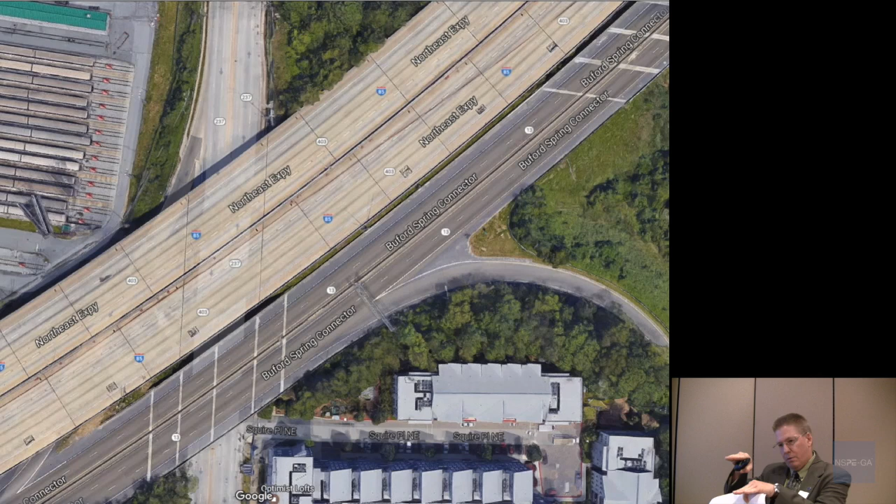One thing that's kind of interesting: 85 kind of sits up at this elevation. Buford Spring Connector sits down a little bit lower, but it's still not all the way down. So to me, it looked like there's kind of a high bank along Buford Spring Connector where it dips down. There we go, back. Where it dips down under the bridge a little bit.

So just from what I saw at the fire, it looked to me like as this fire was going, the fire kind of migrated this direction. And that's what we ended up seeing. We had damage. Obviously, this span was down. We ended up having to replace this span, and then all these three spans as well. But it looked like the fire headed this direction where it was open out in this area.

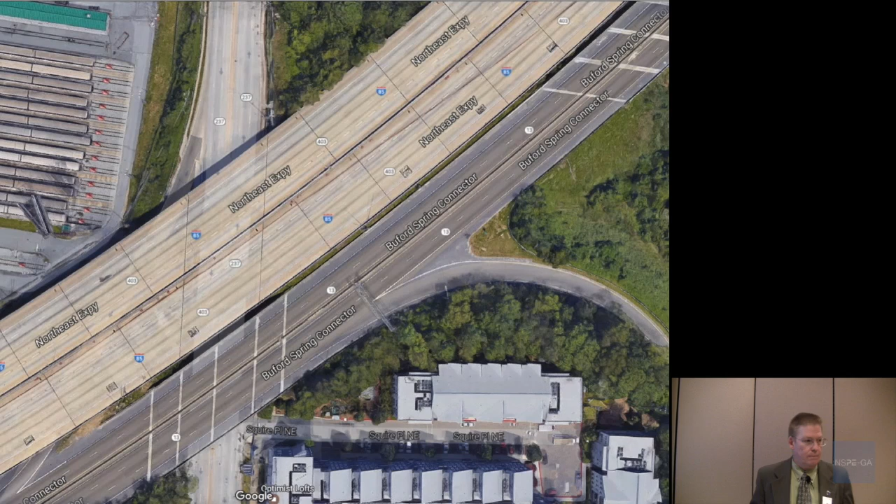Certainly not the first night. First night you couldn't get down there. This is probably demolition starting on the 31st. The event happened the night of March 30th. So this is either early in the morning or later that evening. I don't know which one.

It was probably early in the morning, but I know at some point during the night, because of the materials that were down, they were still burning. The contractor had to come in there and open it up and vent it so that the firemen could put the fire out. So when did you let your first contract? So, good question.

I went straight to the office when I got out to the site at probably 1 a.m. in the morning. C.W. Matthews had already moved on, and they were setting up. They were setting out traffic control. They were setting out what we call light plants to light up the site. And then they had a sub come in. This is D.H. Griffin, you can see here. They had a sub come in to primarily work on their demolition.

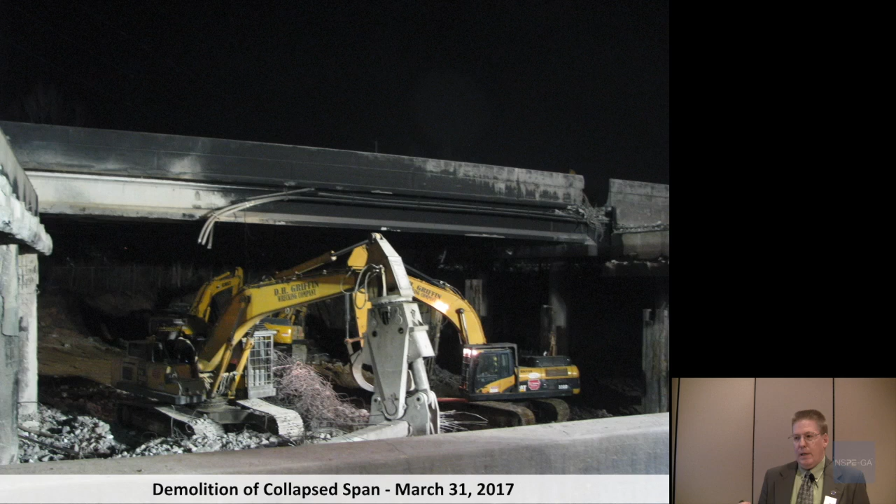Now, in these emergency type contracts, it's two phases. One of it is the demolition. The other phase is the reconstruction. We can handle it both ways, but in this case, we needed to handle it in two phases. With the demolition, we can handle it by what's called a force account. That way, they start bringing in everything, and we're monitoring what they're bringing in to work.

And what we have is these guys. So this is a DOT inspector. This is actually a Moreland Altobelli inspector. They're out there monitoring what equipment's out there, what labor force, and what time they're putting in. And that way once we agree on a price, all we have to do is work on that total amount, the time that was there. We just pay them for the amount.

So this contract was written before this thing happened? Not for the force account, no. And I'm not sure exactly at what point the force account was executed. What we have to know is what are the common rates for that type of work. And then all we have to do is maintain a record of what's out there, and then we just back figure. So it's an on-call contract? I don't think it's an on-call contract. It's just set up. So something like this happened, and then Russell or somebody called up C.W. Matthews and said, "You guys need to be here."

Most likely, yes. Yes, okay. Yeah, and it's not something new. I mean, we've done this a number of times. I was telling, I think, Phil or Steve earlier that we had the fire up on 285 around the perimeter years ago. We had a couple of contractors show up there, and we have a number of things that happen

throughout. We'll have bridges that are impacted, and I had one a year and a half ago out on Memorial Drive where we had a retaining wall fail, and we get the contractor out there, get them in a force account, calculate all the materials we need, and we just pay them back. That's real handy in this type of application.

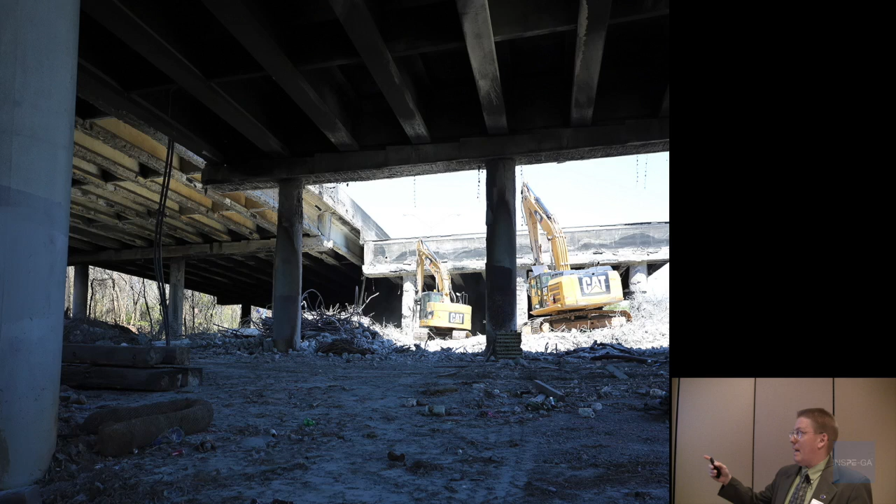DH Griffin, this is probably the first light, because you can see all the spans are up except for the one collapsed span. They were hard at it trying to demo the project. I really wanted to focus in on a couple of slides. It's kind of hard to see because most of the slides aren't very good, but you can start making out some of the concrete where the concrete spalled.

Well, I'll show you on this part. Now, this is interesting, and there's going to be a better photo when I get to some of the sheets that were prepared. This type of cap is what we call an inverted T. So it's a T shape. The beams sit down on the ledge, and the top of the deck comes in right at the top of the cap there; the deck goes right over top of that cap.

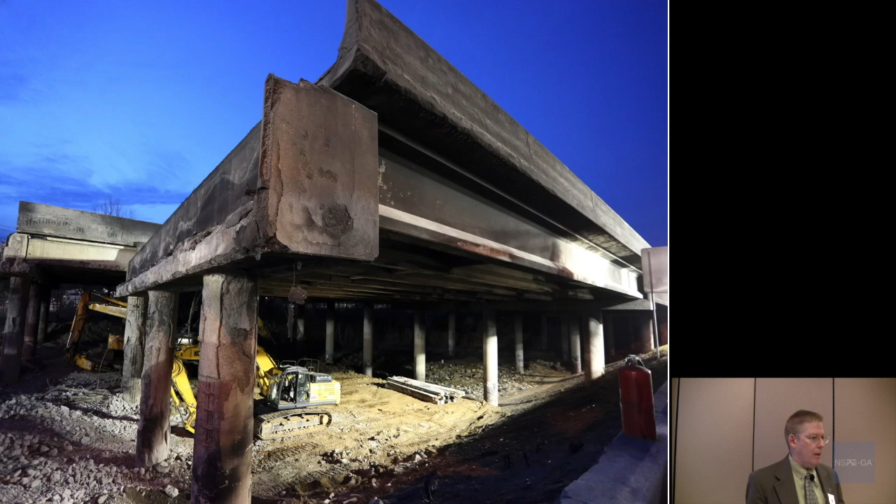It's a little bit different than what we normally do. It's typically used for low clearance situations where, if something's going to drive up under the bridge, you'll do this type of construction. Well, if you'll notice here, this is where the span collapsed, and that ledge is entirely in place. Which suggests that the span just overheated, the strands relaxed, and the span fell, but the substructure stayed intact.

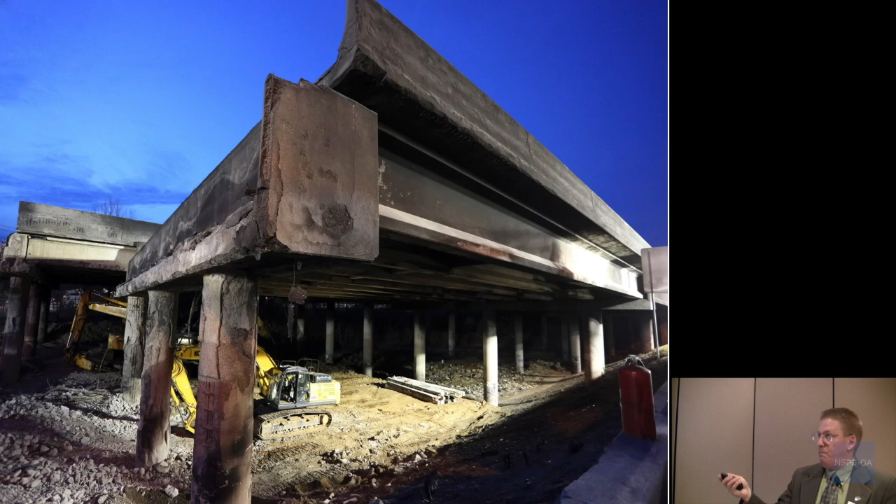Excuse me? It does. I'll show you bearings as we go on, and there's some dowels, and I'll show you a picture of what those look like eventually. But here you can see the reinforcement is exposed. This has not been hit by the demolition. This is purely fire.

Like I said, our inspectors were on board that night. First of all, you get there and assess the whole scene, but then you've got to wait for the fire to get out. It was smoky. Even when I was there at 1 o'clock, it was still way smoky. But you've got to assess it. You've got to be careful because you don't want to go under it not knowing if something else is going to come down.

So the inspectors, as they got in there, were noticing that some of the columns were showing signs of buckling. That's when you really get concerned, very nervous. So the span's down. We know 85 northbound was out of service. It's when we started seeing signs like this along Piedmont, and seeing that buckling shape, knowing we've got a real problem over Piedmont.

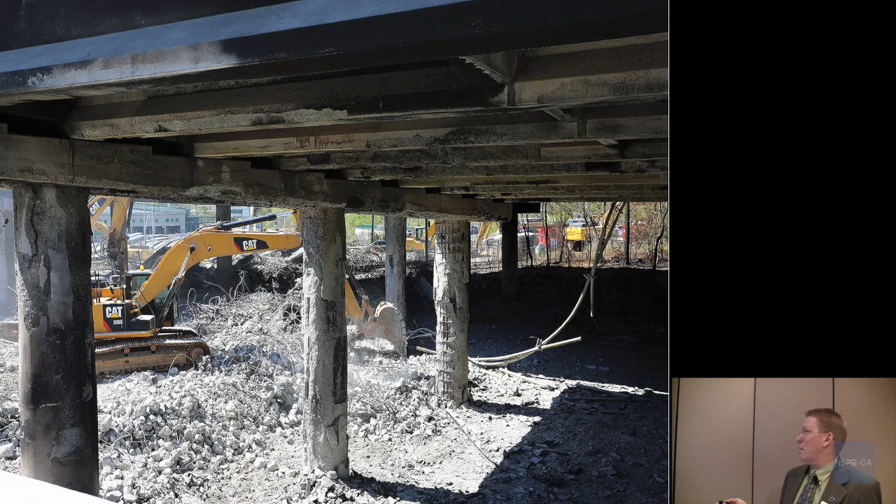Just one last final photo. There again, you can see the damage along the pre-stressed beams as well. All of that concrete starting to spall and burn up. The fire will do a job on concrete just as well as steel. So,

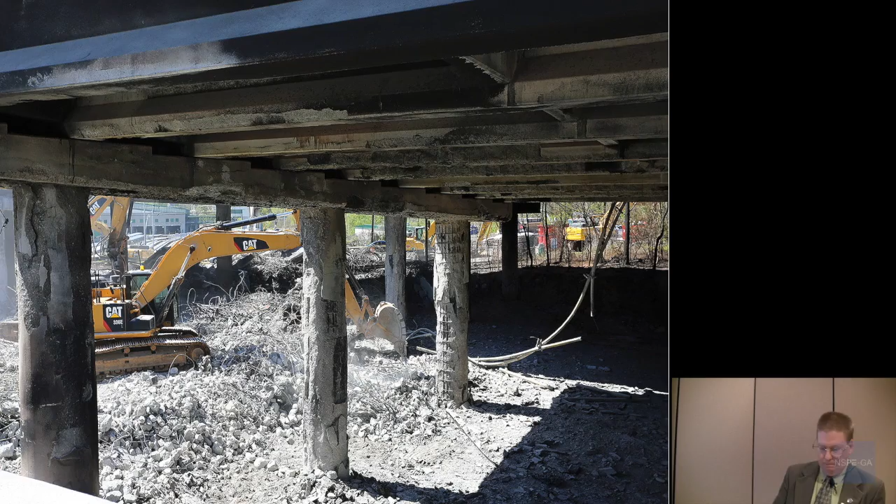So when I got to the office, had another engineer from my office come in, because there's not a lot to do as we're assessing things, other than basically pull together all the plans, talk to my people that are in the field, and start getting familiar with the plans.

And you'll see as we go through this kind of how, if this had been just a routine, if I go to bent 31, 32 this way, everything's nice and spans are all identical. You know, that would have been, I don't know, better. But in this case, everything's different, and you'll see that as we go. How many different families did you have? Six. Everyone is different. Yeah, I think these two are probably the only two that were the same.

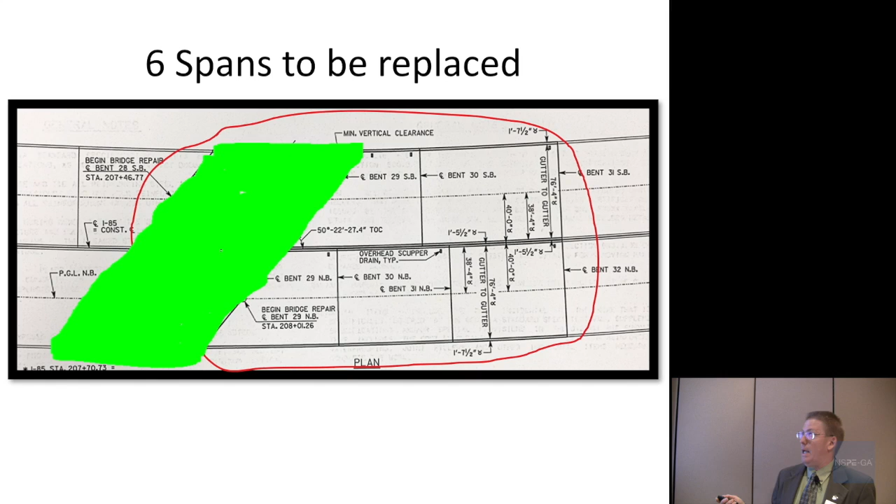You know, we have an opportunity now to just... this is what we're producing now. We're putting this in most of the bridges. The only difference is now I've got to redesign some beams, and back to where we were. That's with all these spans. It's a total of 61 beams, but I can't remember how many beam designs. Every one of these trapezoidal spans has numerous beams because they're all different lengths.

Now, not everybody's a civil in here, but you know what concrete is. Concrete's very strong in compression, but it's not strong in tension. So we counteract that. We put reinforcement in there. Well, with the pre-stressed beam, we put these strands in there. They're high tension cables. Instead of a grade 40 bar, grade 60 bar, they're 270 KSI.

So we stretch each one of those strands about 33,000 pounds. You put about 30 of them in there, that's about 900,000 pounds of force that we're putting back into those beams. And so that's what was happening with the existing beams: when that temperature hit those beams and they started unraveling the concrete, those strands started relaxing. And that's really not a good thing. Anyway, so this is the design that we had to work with.

You mentioned the dowel or the bearing. We'd have a dowel pin that goes right up in here inside the end of the beam, and that's what keeps the beam in place. And they were there in the old bridge as well. When was this bridge built? What year? It was built '83, '84, around there. Okay. Yeah, it's not that old. No.

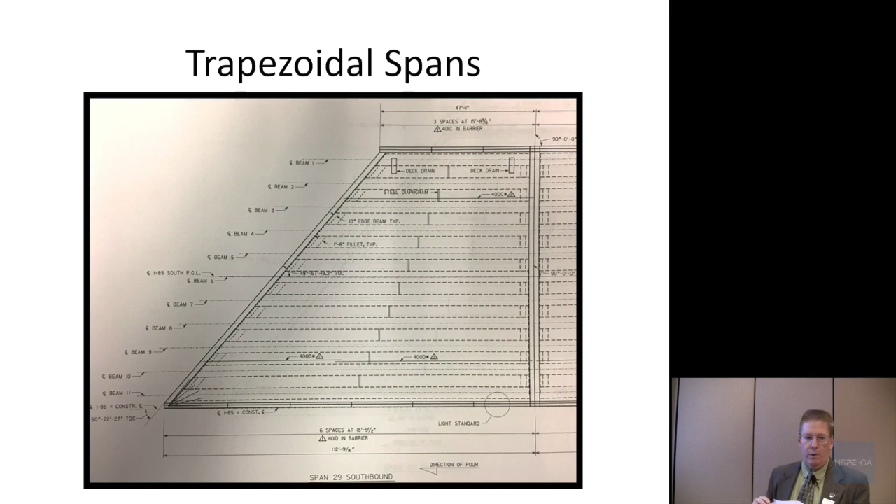But you can see the trapezoidal spans. With the pre-stress force, you put all that force in there. Depending on the length, depending on the weight, that force will make the beam camber up. Well, I can't put the same force in this beam as I put in this little short beam. So we had to keep modifying our design until we worked out every one of them. How many beams were required for this? 61 total. Yep. How about the columns?

Columns were in pretty bad shape. They were in bad shape until you got down below ground. Once they're insulated from the heat, they were okay. And so we got out there trying to assess what we should do with them. You can't be certain about how good the steel is that's left. My confidence level in the steel was shaky.

But what we ended up doing is we chipped in, and I'll show you pictures of the contractor out there chipping in and getting real close around these existing columns. This is the existing cage, and they got those bars cleaned up, and then we formed up around them, built a new cage, and poured all around those columns, and that way we totally encapsulated what was there.

We also had to come in, and there's a little line right here. It's kind of hard to see. That's where we cut off the old column. And so from here up is all new column. This part's encased, but from there up is all new.

Yes, sir. When you chipped away the outer ring of concrete, was there any heat stress on the steel? Potentially, yes. But since we dug down underground, we were able to come in and encapsulate it and capture the lap that was coming up from the footing, and we didn't worry about it after that.

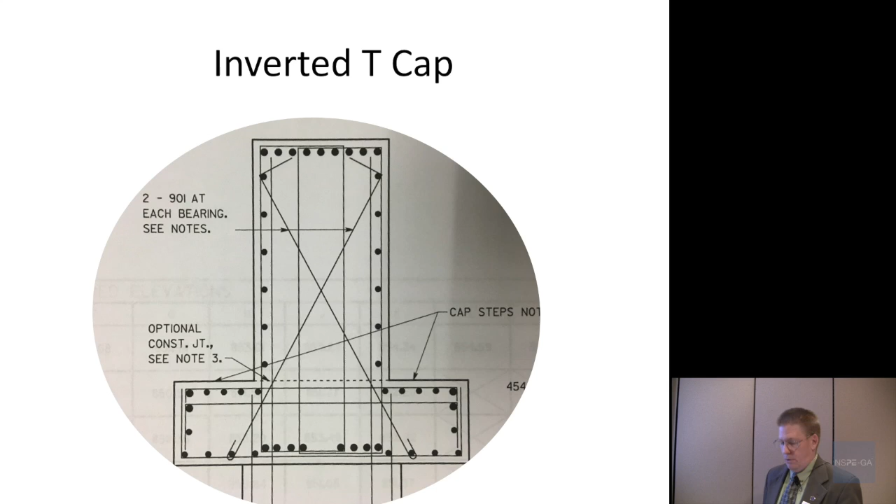Just like those beams, as we're designing those beams through the night, through the next day, we're feeding that information back to CW, and they're feeding it to their fabricators so that they could be in sync with us. But also what was critical is getting the column reinforcement and the cap reinforcement so that they could go ahead and talk to their suppliers and get them ready to generate the steel. And I'm going to quit doing this. All right, put that down.

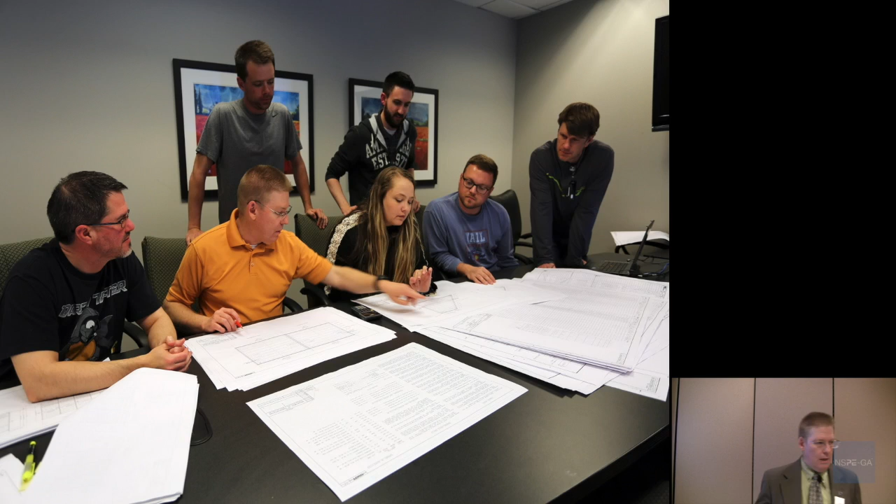So we started that Thursday night. We worked all day Friday and Saturday. This was coming up fairly late Sunday evening. And this is just part of our team that was there. What we had done is we pieced it out. We had certain people working on beams. We had certain people working on substructure. We had different details. And what we're doing here is trying to pull the plans at that point together.

This is another one of my assistants, Steve Gaston. We'd gone through doing our last set of markups to say, okay, this is what we want to change. Let's get these down. This is our last run, and let's get these plans completed so we can get them to the contractor. It was actually kind of interesting. To me, it's almost like working a design build project, the designer working for the contractor. Typically, we design, we set it out for bid, and build it.

We're giving CW information. Demolition was going on. We're working on plans. We're feeding them information. They're feeding us information. We're talking with suppliers, not just the beam fabricators. I talked to Augusta Iron and Steel about the steel diaphragms, you'll see in a little bit. Talking with a supplier for the deck drain system, and the supplier in Texas for the bearing pads. So it was constant communication throughout this whole thing. And also CW had their own engineers working on it, back checking us, which was really phenomenal.

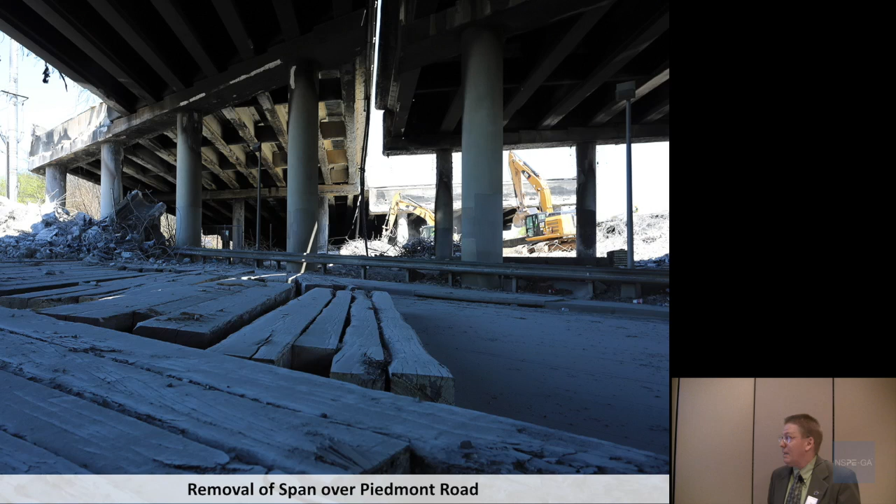You'll notice this. This is going back to the little bit of demolition. This is the span over Piedmont. That was critical. What the contractor chose is they put down some matting, and they started working and taking the span over Piedmont down. And we needed to get that down and get it cleaned up so we could get it open.

We also worked to get Buford Springs open, but like I said, it's not just a bridge effort. This is a GDOT effort. Andrew Heath as a traffic engineer, some of the things that they did is they restriped 85 getting off onto Buford Springs. So instead of one ramp lane coming off, they striped it for two to get more people out. They did the same thing back the other direction.

They restriped around Sidney Marcus, and they even striped up on 285 and 75, trying to help traffic out. And there's some signals down in that area. They helped do some adjustments on some traffic signals, which really improved the situation. But that's what we needed. We needed everybody to come together. 85 has around 240,000 vehicles a day in this area. Where are they going? Everywhere.

So. I've seen most of them today. Yeah.

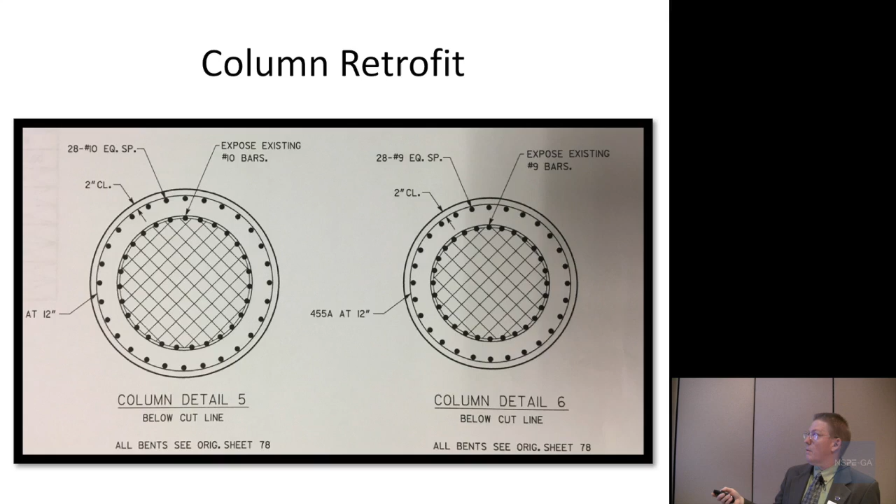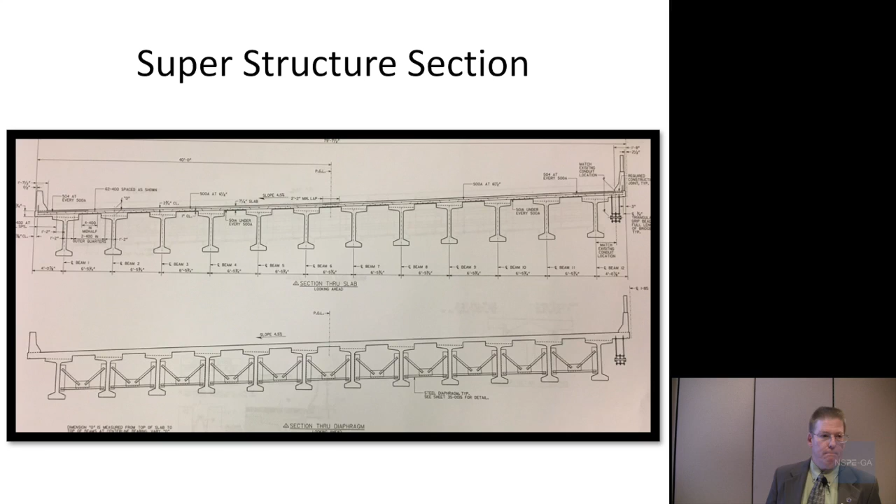All right, so that's where the beams sit. So these beams right here span. This is a cross section. That beam spans from one cap to the other. And there's 12 of those in a span, and then a concrete deck lays on top of it. I see. Okay. And the bottom flange sits on the bottom corbel of the inverted tee. Yep. So it's going to sit right here on this part. These are beam seats.

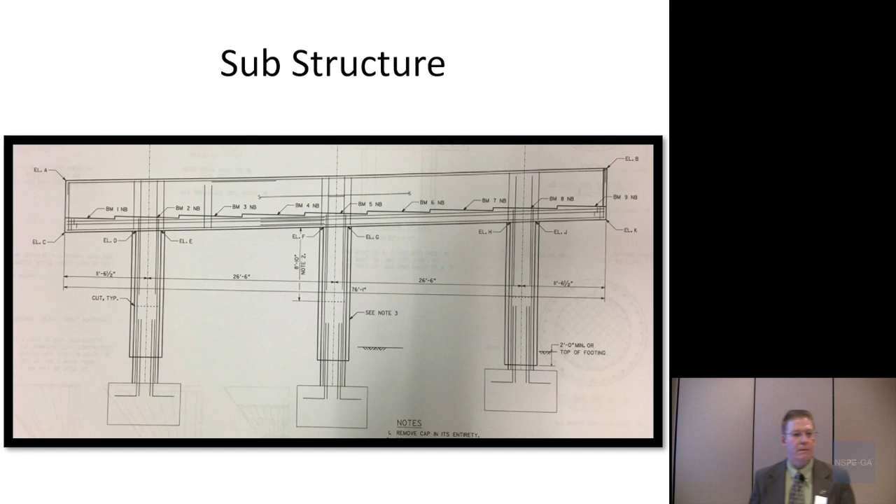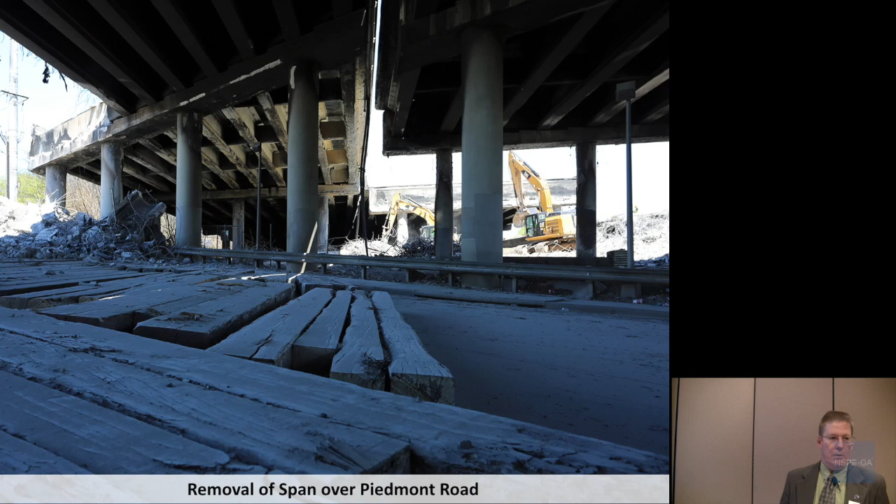Instead of doing it in steel instead of concrete? No, not at all. We got these beams here, but to redesign that many beams and to have them fabricated in steel, I don't think it would have saved us time. And that's really all we're facing with this, is time.

We're trying to get it done and open this as fast as possible. Yes, sir? So, doing your redesign, did you use the whole plan for these major dimensions, length of spans and column spacing and all that? Did you redesign all this too?

So, we pretty much stayed with all the dimensions. We had our survey crew out there. So my total worry in this whole scenario was getting that last beam placed, because I'm worried about where the survey is. Because our surveyors went out and they started spot checking things, trying to line up. And the first indication I got was, well, the intermediate bent's off by 3 inches, and this other bent's off by 7 inches.

That's a concern. I'm an engineer, a structural engineer. We typically detail bridges to about 1/16 of an inch. That's pretty much where we go. So certainly concerned about the geometry control. But yeah, we used all plans except for the superstructure. We had to pretty much redesign most all the superstructure. We were able to use a lot of the plans.

Now these plans, like I mentioned before, this plan set was for a bridge that was 4,500 feet long. So we gave them the whole set of plans, but we had to pull out the pieces that pertain to this. And that can be tricky when you're looking at 30-year-old plans and trying to disseminate what's in there and making sure you have everything. And I can say it tripped us up a number of times, but we figured it out.

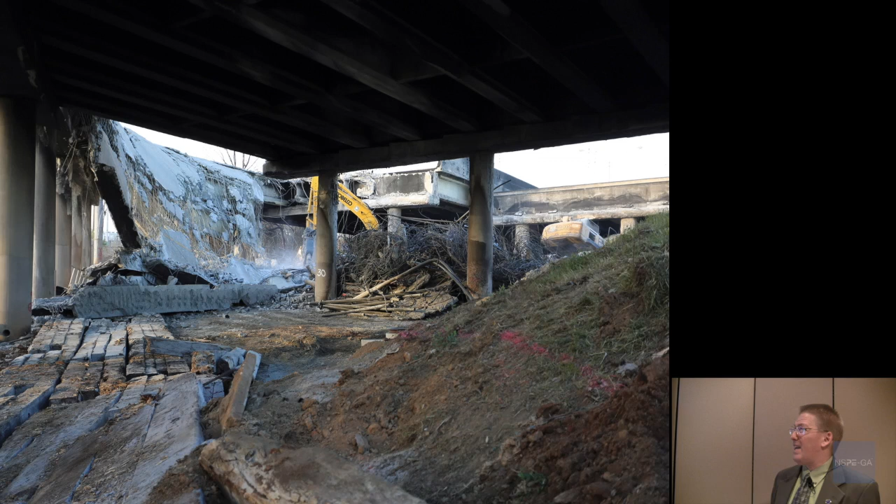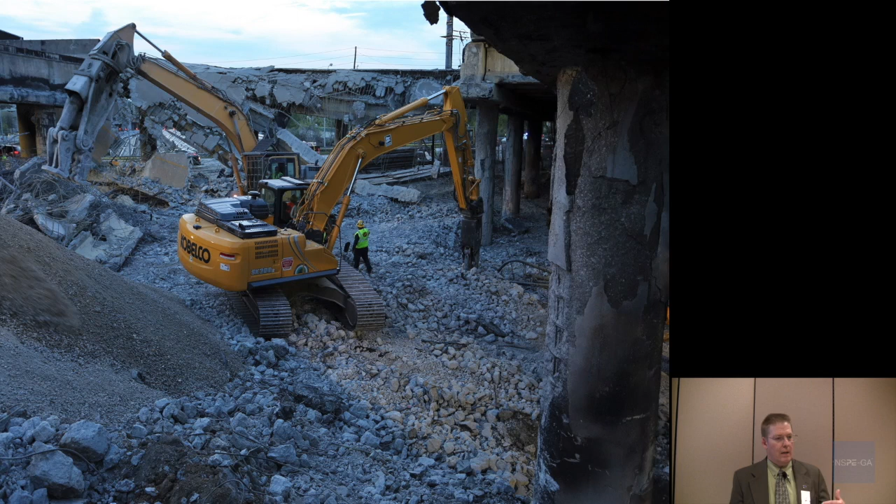Just kind of an idea what the site looks like when you're tearing down spans. Like I said, it's a mess. Yep. So hard photo to see, but all this concrete, once you get all the concrete down, it takes a long time. They have to rubblize it. They have to sit there and just break it up. And as they're breaking it up, there's just piles of reinforcement laying around, because they're putting the reinforcement over here and the concrete over here, and then they have these trucks coming in. I got another photo where you'll see trucks backing in where they're loading all this material up.

Good question. They hauled it off to sites. Yeah. I'm certain the contractor takes over all that, so they get to piece apart whatever they want. But I'm sure they recycled all the steel. You'll buy that. Eventually.

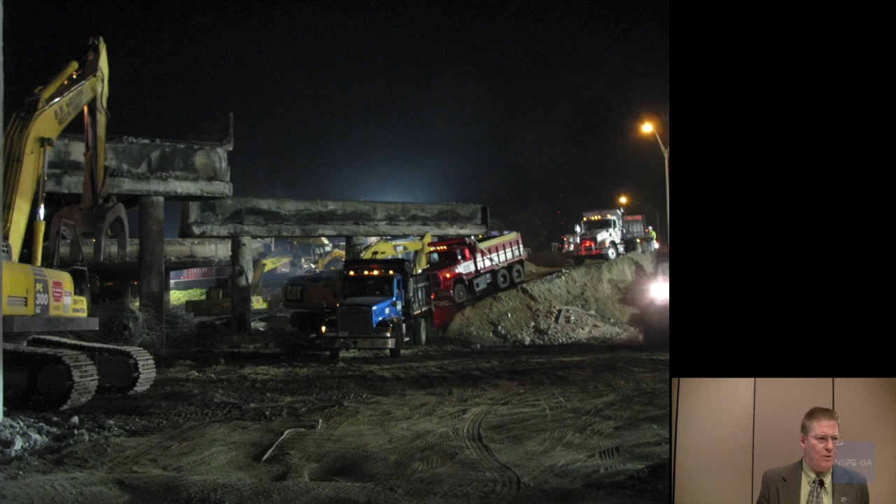So actually, this is another hard picture. It's so dark in here, but you can see they actually had to construct, coming down from Buford Spring Connector, kind of a ramp they had to build in to help with the demo. It's not real easy to see. We still have caps that are up right here, but you can see how there's not a lot of material on the ground at this point. I wish I had the date of this photo, but just to put it into perspective.

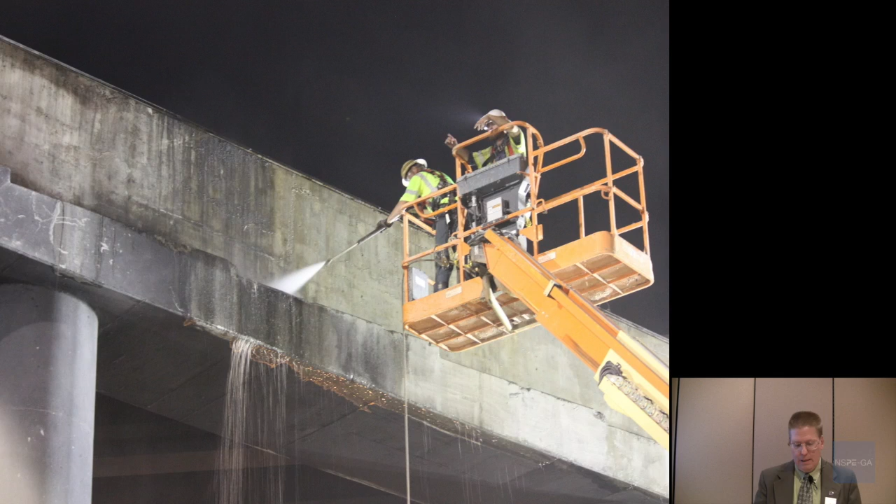Now, one of the things we had the contractor do, in the middle of the demo, once they got the main spans down, is we had them go back in and pressure wash the adjacent areas. First, obviously, you want to make it look good when it's done, but the main reason is we wanted to get it cleared off so that our bridge inspectors could get back out there and get a good look and make sure that what we are keeping is still good. They were out there pretty much every day until that was done, and once they gave us the okay on the existing bents we were keeping, they were out of the picture. But C.W. Matthews did a phenomenal job getting this cleaned out.

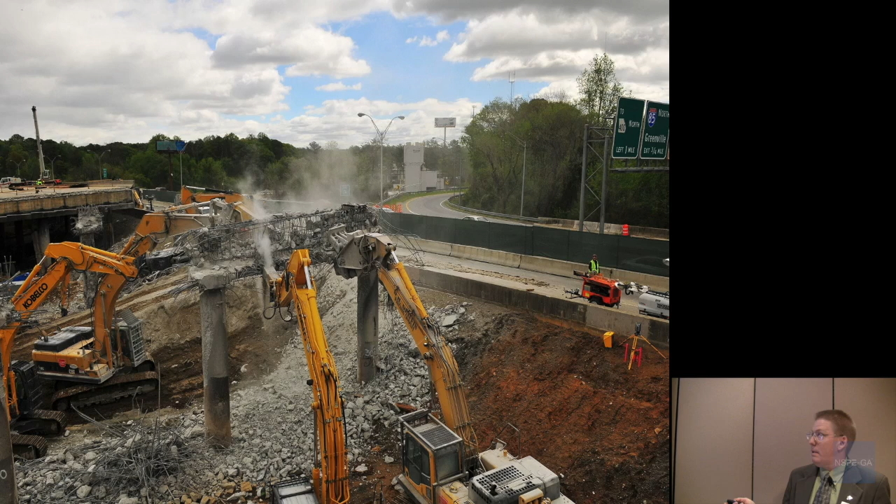This is another photo. Those caps, this is interesting because as they're working their way down, here's one of those caps with all the reinforcement that I showed you in that one detail, and they've got four machines sitting up there just pecking away and taking it down. And I'm in my office going, no, you can't drop that. Careful, don't cut it off. And they're like, no, we got this. And they really did. They did a phenomenal job taking it down to pieces and not damaging the columns.

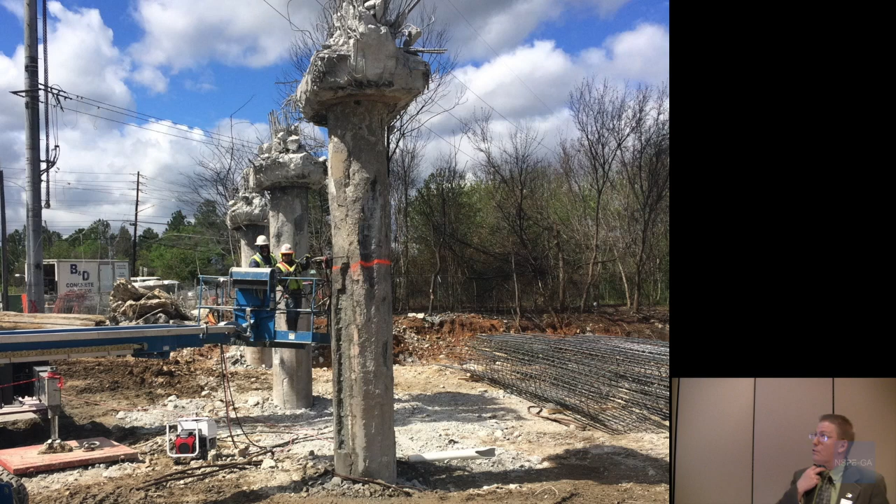Just to give you an idea. So the caps are gone, but this is interesting. I know you can't see it, but you might be able to see this little orange line there. That's that point I showed you before where we said, okay, we've got to cut the columns off at this point and build the rest up. That was a critical point right there. So that's what this guy's doing. I had a video for this, but I didn't bring it. The guy's up there and he's got that saw just cutting the column in half.

And so as an engineer, when you get out to see these kind of things, I've been doing this for 25 years, and that's fun. That's exciting. Did they cut the steel and the concrete? Cut it all. Just cut it in half. How do you keep the top half married to the bottom half when you put it back? I'll show you that. Okay. It's easy to draw a line and say cut here, but watch this here.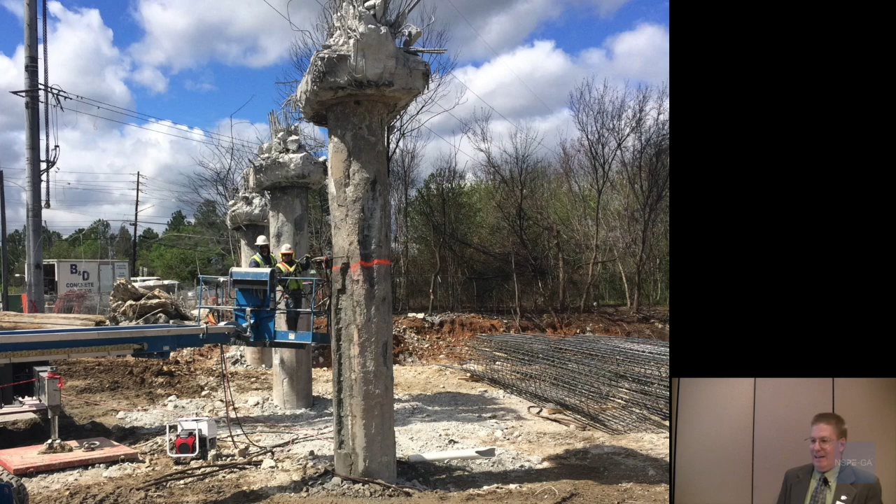Absolutely, yeah. And you look at these caps and you walk out there, and this thing's got a 4.5% cross slope on the bridge. So if you looked at those caps, they're sloping down pretty good. And we said, okay, you've got to cut it. I think it's 8 feet, 10 inches below the existing cap. But when you say cut it here, the next one's lower, the next one's lower, and you're sitting there going, is that right? Is that right? But it was. It was all right. Yeah, exactly.

But this is what it looks like when it's cut off. Still kind of cool. You look at it, so there's reinforcement. It's hard to see, but this is kind of in a rectangular pattern. I'll talk about that in a minute. And then there's reinforcement that goes around the edges. And then the drain. They had the drain that ran right up the middle of the columns.

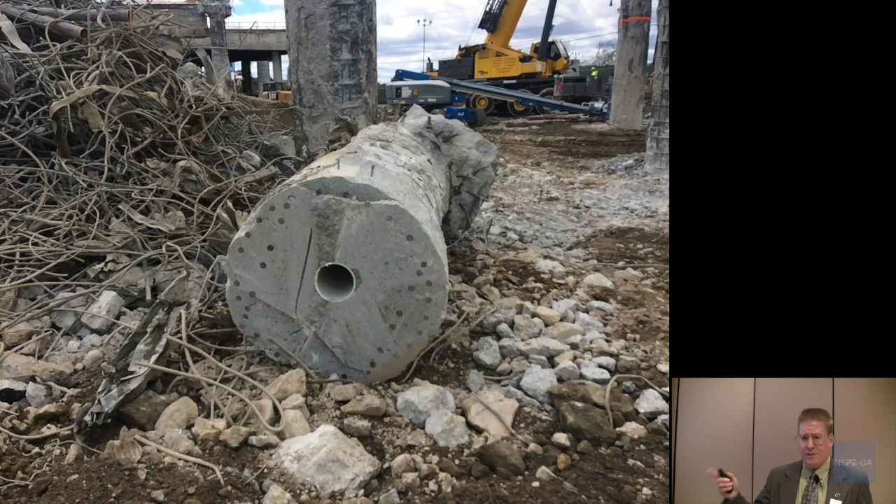So one thing that we did is we didn't hook back the drain system. That would have been a little bit more challenging to do drain plans. We ended up just coming in and said, okay, we're going to rework the existing drains. We built a gravel pad underneath them and said, we're just going to drop it down for just this section, and it really should be in good shape.

But here, I mentioned before about the guys that had to get in there and pick away all the concrete around the reinforcement and expose those number 11s. Now you could take off these ties, but the contractor had them on there, and he's like, I don't want to take them off. I'm like, well, that's fine. It keeps it all together. But they chipped in all around all sides, got it good and cleaned. That's kind of what it looks like after it's clean.

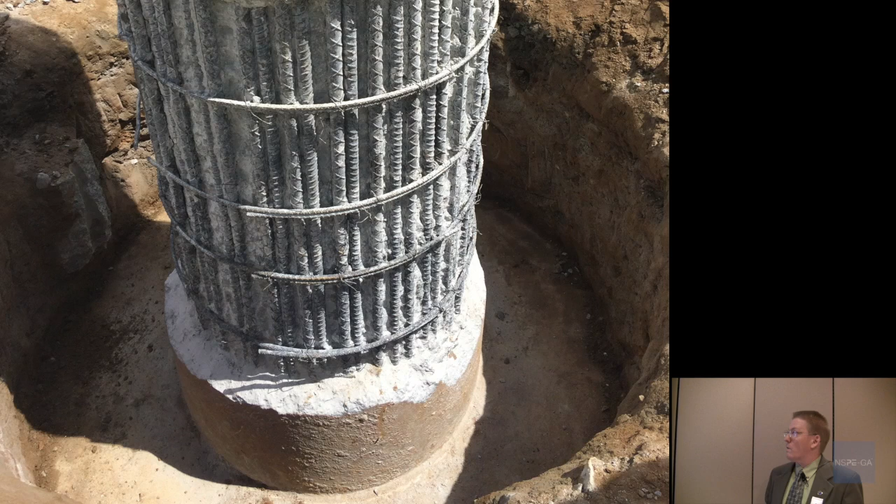You can see the footing down here. So they cut this off where we wanted it, and then they ran their form down and set it right on top of the column, and they dropped the new reinforcement in right down on top of that column. And before we poured it back, we made sure we cleaned it off. The contractor, before he put the form on there, we had him pressure wash it, make sure that all the laitance was removed. Then we had him wet it back down before we poured our concrete back in.

We wanted to make sure that, this is a hot mix. You probably all heard that on the news. Everything we're using is a hot mix, early strength. And we're trying to control the shrinkage in it. So we want to make sure that core is as wet as possible before we poured it.

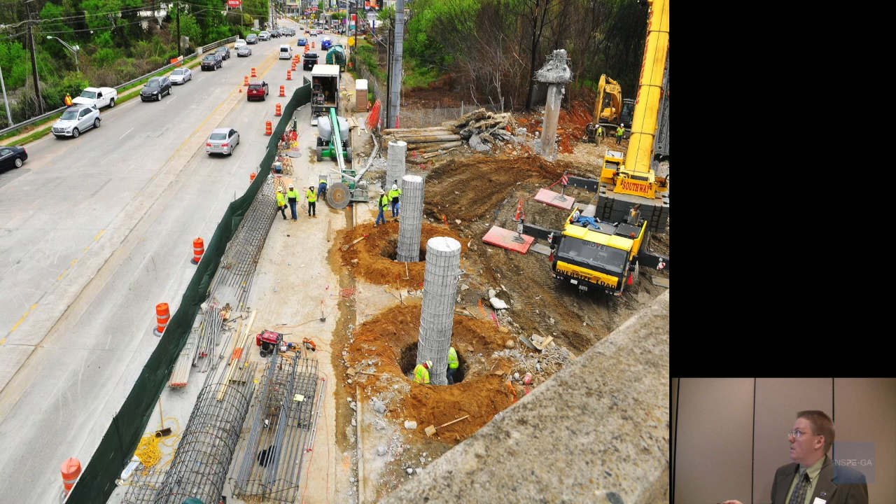So these are the columns there along Piedmont. Of course, that was the first part. Now you can see there's still a lot of demo going on, and we're getting ready to get these positioned to pour. So it's kind of an overlap between demolition and the actual construction.

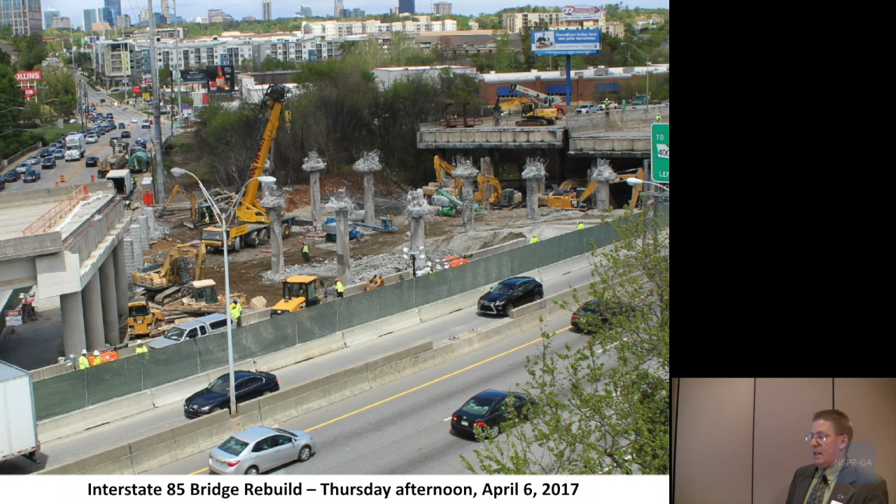So this is just to kind of, I got a few photos just kind of going through the construction as it went. And so this is April 6th. We started midnight or even this March 30th. Here it is, April 6th. All 4 columns are ready to be poured at this point down next to Piedmont. And they're still just chopping away at the columns and old caps and removing those. The site is relatively clean, which is that they did a phenomenal job.

So 5 more days later, it just keeps continuing to change, just overnight. Of course, they were working overnight. Here we've got Piedmont columns are poured. They've got their bottom form in to start construction of those caps. That's bent 29 southbound. Back over here, bent 30 is already poured. They already have that form in. So in 5 days, we went from that to that.

Let me back up one thing right here too. This is April 6th. I don't know if you've seen. We contracted with a company called Ox Blue. And OxBlue set up a camera out there to oversee this work. So if you haven't seen it, you just go Google OxBlue I-85. You pull it up. You can pull a live version up.

You can pull up the photos. I got it on my phone. I check it every hour. I haven't checked it in a while, but it was great to see because you could see what's going on and you could talk to people. But anyway, that's 5 days.

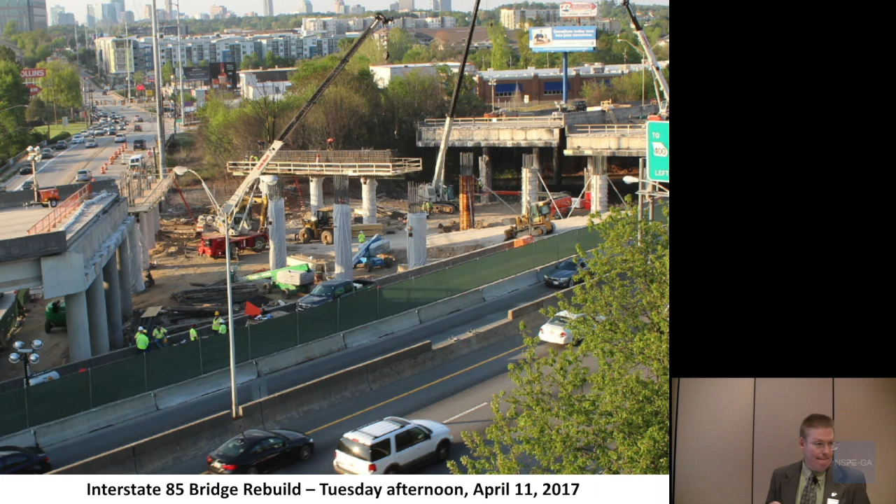Huh? Good deal. So also, it's hard. This is not a very good shot.

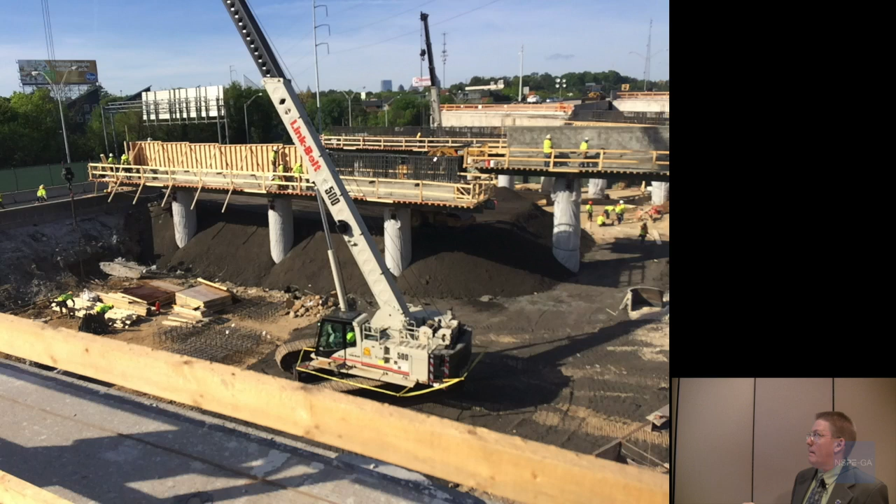The existing dowels, there's a guy with a coring machine right here at the core. You can't really see it too well. He's coring out the old dowels because we want to put those back in. How big are the dowels? They're 1.25-inch dowels. So this right here, he actually had to come back in, and that ramp I showed you before with the trucks coming down, he came back in with asphalt and built it back up because he had to bring an 800-ton hydraulic crane in to set the first beam.

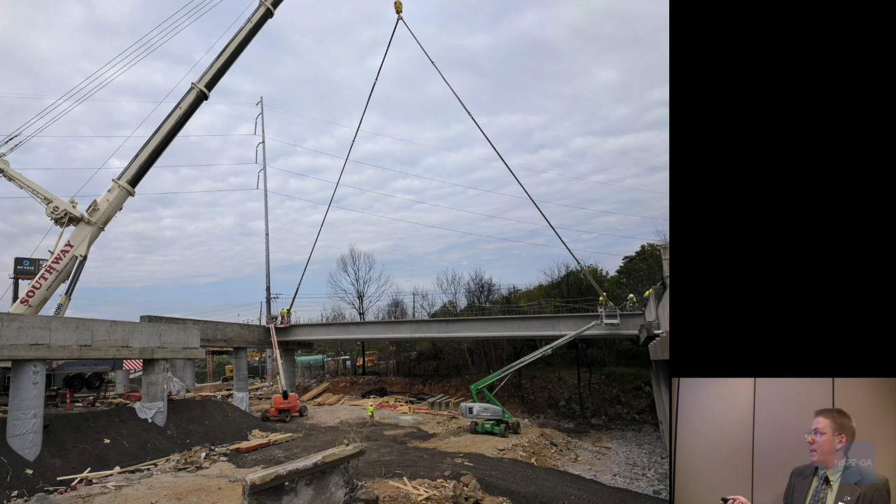Now this set the first beam, this is my birthday, April 17th. You know where I was. So yeah, he set the first beam, that's a 114-foot beam going in the span. And they went like clockwork, setting the beams in there. It's more difficult than a normal bridge where we just set the beams on top of the columns. They're setting them in between.

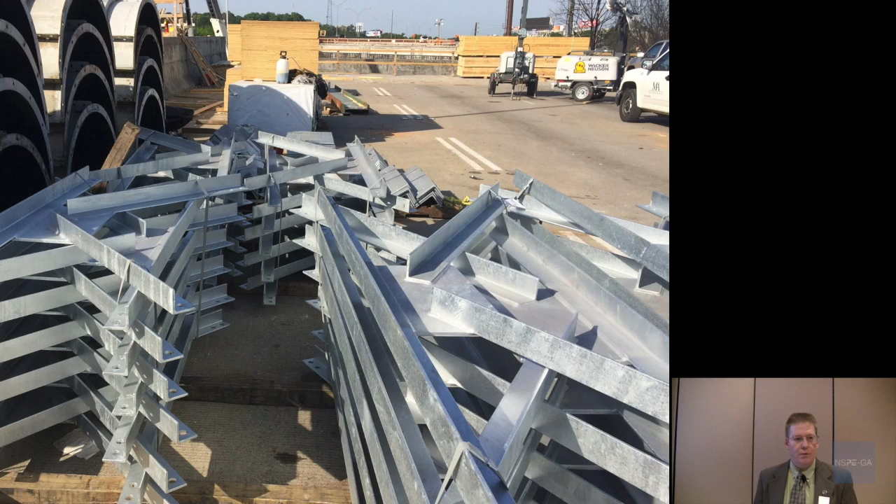These are some of the steel diaphragms that we used. This sped up construction. We knew ahead of time the contractors wanted it, so we didn't even bat an eye. We just said, we don't normally do this, we want concrete in there, but we went ahead and just put them in there. And I know he loved them.

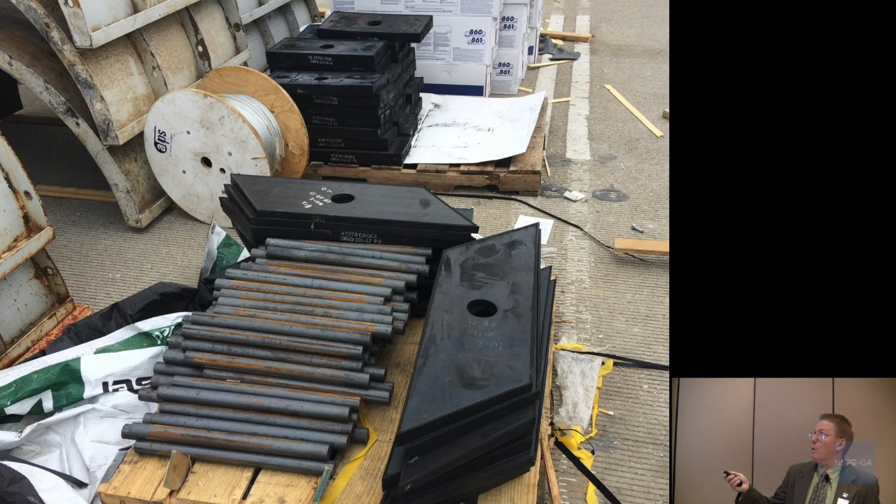So these are what the bearing pads look like. Typically the bearing pads are these rectangular ones over here. But because of those skewed spans around Piedmont, we had to have these skewed bearings. And I can tell you, for everybody in my office, this is the first time we've ever dealt with the skewed elastomeric bearing pad. So that was interesting. And these are what the dowel pins look like. The dowel pins go down in the concrete, come up through this pad, through that 3-inch diameter hole, up inside the beam. And that's what keeps it on the cap. So they're steel then? These are steel, steel dowels.

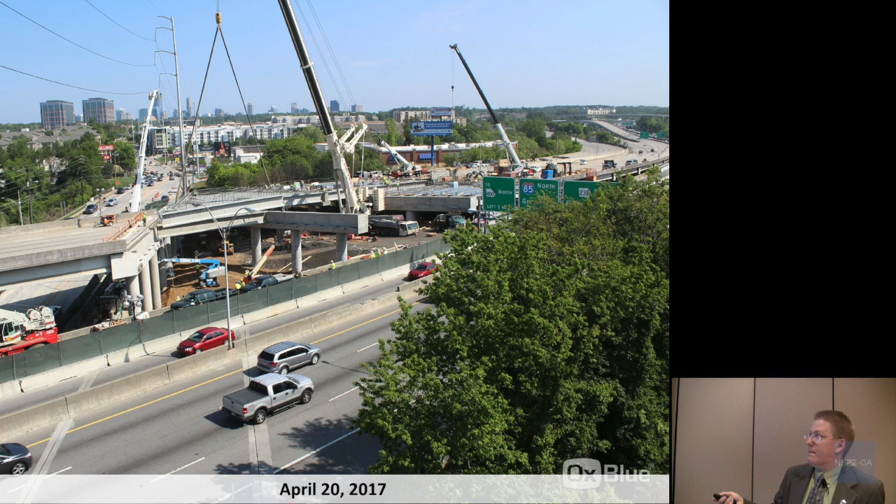April 20th. We're setting beams. So this 800-ton crane is in the middle. We've got about 4 spans that he's setting around there to set the beams all around that side. After he gets these set, he's got to get this 800-ton crane out because then he's got to come back and set that span, which is what you see here. It's set at this point, and then you can see the 400-ton crane.

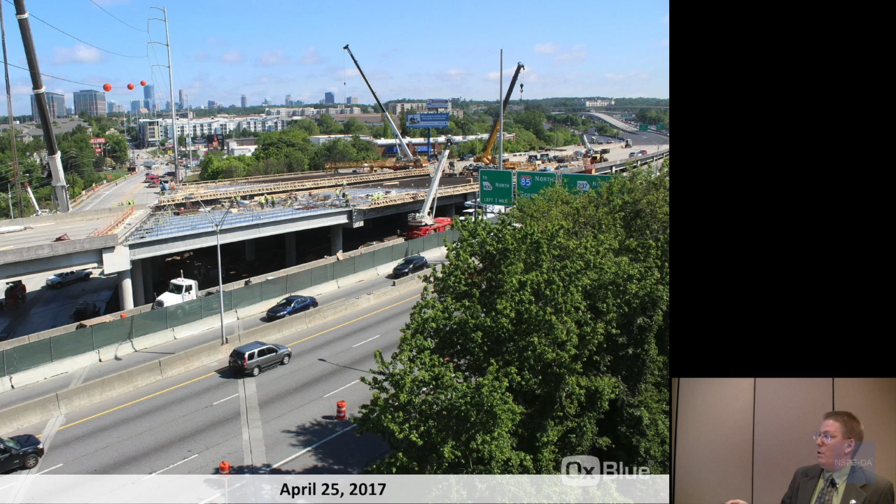This is actually a picture on April 25th, where this 400-ton crane is sitting out here. It's already set this span, and this is setting the last span. You remember that 24-hour closure on Piedmont? It started at 9 a.m. or whatever. That's because we had to have this crane there.

And I want to point out something else too: this power line that went right across the top, and that worried everybody. I know it worried the contractor. CW worked very closely with Georgia Power. I don't know at what point if they shut that line down. I think for the most part they were trying to keep it energized the entire time. Typically we don't get real close to them when we're working, but they work real closely with Georgia Power.

Yeah, exactly. But it's not just the crane. I mean, we have the crane to set the beams, and they did a good job. But also when you come back and pump the concrete for that deck, you have to have a pump truck, and that was a real concern, to get the pump truck to stay underneath those power lines.

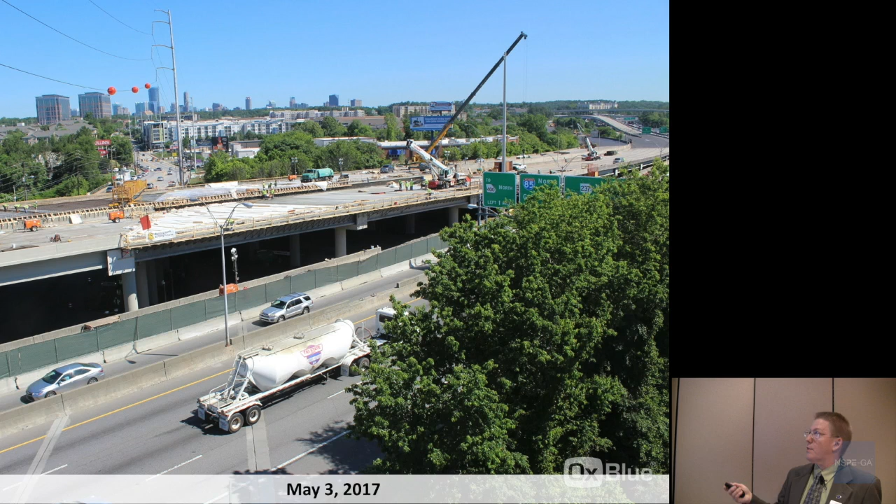They had pump trucks sitting up on the end here, and they pump it out. And the pump truck for the span over Piedmont was sitting on the adjacent span, so it was sitting on the northbound span, pumping to the southbound. So decks being poured May 3rd. So this is May 3rd. All the decks here are poured except for Piedmont, and then May 7th.

May 7th, that was yesterday, Sunday. May 7th, it's all poured. All the decks are done. I mean, poured, not done, poured. This is a grinding machine. So they've got a grinding machine out there Sunday that was grinding, has to go in and profile the deck and make sure it's going to ride smooth. And then what they had today was they were out there putting transverse grooves to roughen the surface back.

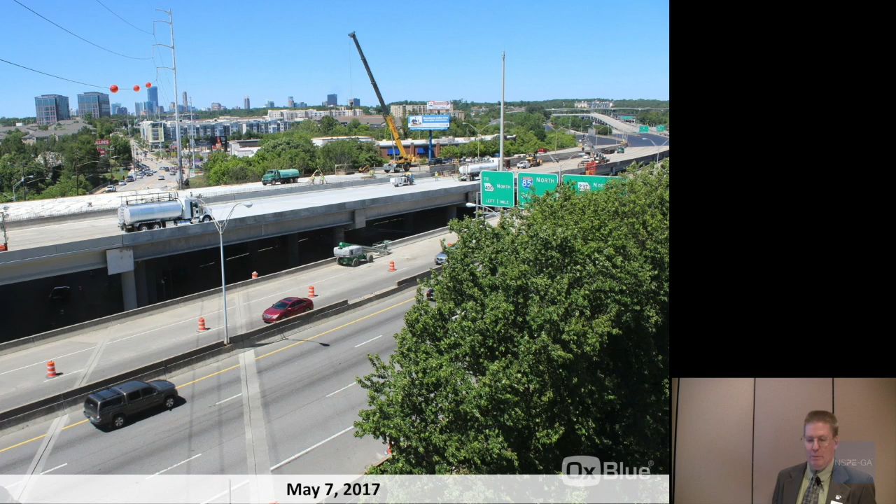So I suspect they'll be coming back and grinding grooving. You can actually see barrier in there that's been poured. So it's really transformed in a very short amount of time. Can we get the same crew to go to 85 or 75 and finish that?

The $1,000 question: when is this opening? It's a good question. So, Memorial Day. Huh? At the latest Memorial Day. That's what they say. What's your number on the lottery? Lottery? Yeah, before Memorial Day.

I heard that they were going to begin resurfacing the remainder of this span, a project that was supposed to occur later in the year. Does that happen? They're well under way. Yes, they are. Already. That contract was already let, right at the same time, and they just got the notice to proceed and got them going quicker. So that's phenomenal. Billy, do you already have this plan somewhat in place for emergency uses?

What's your biggest lesson from this whole experience? What's the biggest takeaway? Well, like I said, I've worked through the 285 fire that we had. I've worked through a number of other large events that we've had, usually bridges being taken out, and I was very pleased. We have a very young staff, a lot of young engineers that were involved in this, and they really came together. They were motivated to just jump in there and work real hard, and I think they learned a lot. I hope they don't have to go through this again, but I feel good that they're ready for the challenge.